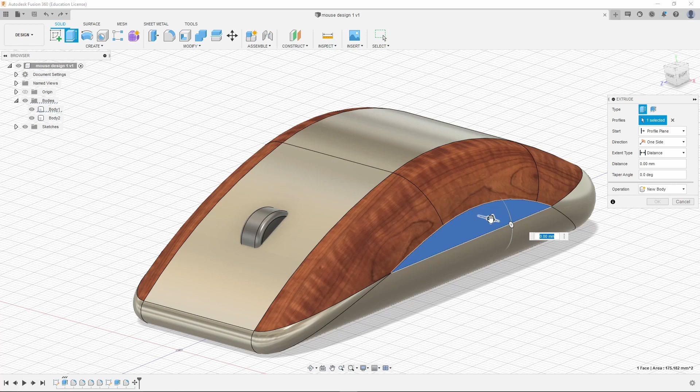With the Extrude tool, if I select a face, as you know by now, you can pull a face out and make it into 3D. But the same way as when we were creating the wheel and Fusion guessed we were trying to do a cut, it does the same with the Extrude tool.

As you can see here, I've pushed the Extrude into the design and it's gone red, and the operation over here has changed to cut. Now I could just push that all the way through like that and create a hollow space within my design, if that's what I was looking for.

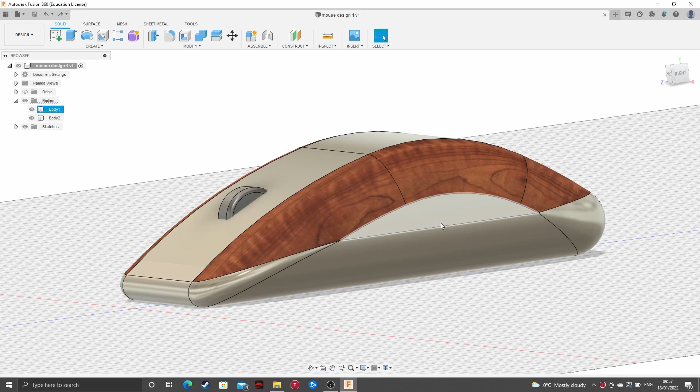As it happens, I am looking for that, but I also want to create a shape that fills this gap, which could be poked out and have additional functions on it. So I'm going to undo that, and instead of just cutting this through, I'm going to first make the component that will fit inside the space, then hollow it out afterwards. You'll see what I mean when I do this.

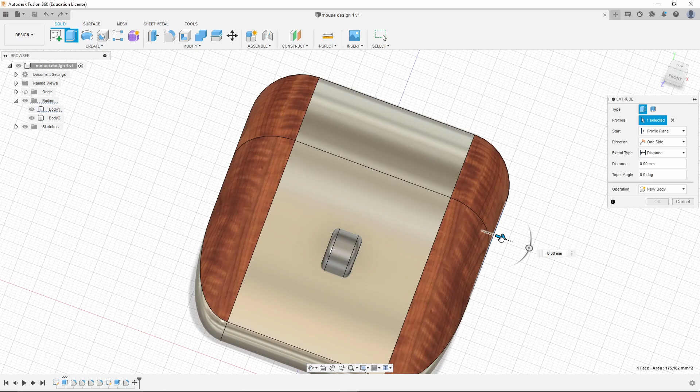If I get the Extrude tool, just like before, and select this face, I can either drag this through until it's level with the other edge. Because I used a nice round number in my design, my mouse is 54 millimeters wide. I could drag this until it's level with the edge, or rather than using distance here, I could go to Object, and as you can see in the description, it extrudes to a body, face, or plane that you select.

Let me show you how that works. If yours is a funny size, I can change that to Object and click on that face, and it automatically works out the distance.

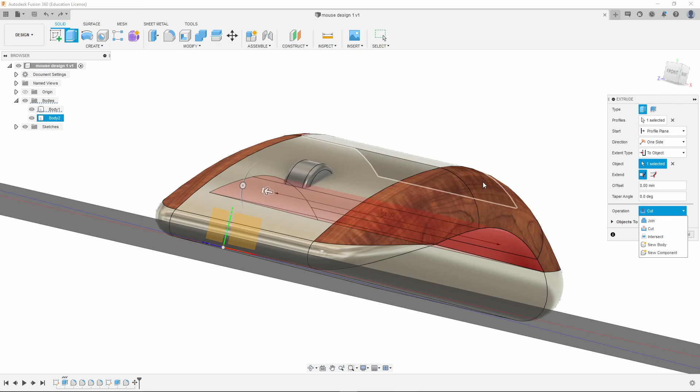Rather than doing what I did a minute ago, which was cut, I'm going to change that to New Body. Like when we created the scrolling wheel, this will be produced as a new entity. So let's do that and click OK.

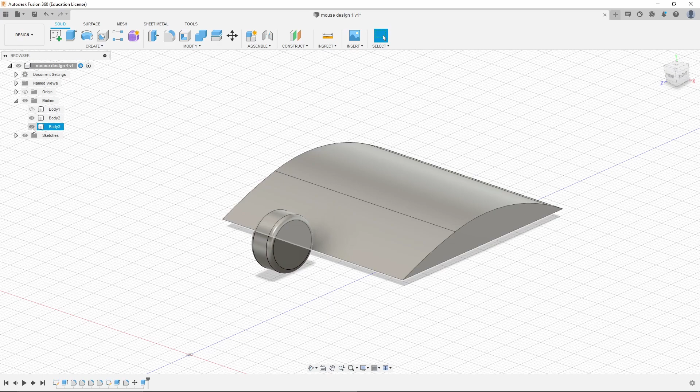As you can see now, I've got Body 1, which is the main body of the mouse. But I've also got Body 2, which is the wheel, and Body 3, which is this component here. I'm going to turn Body 3 off for now—I don't want to see it—and bring back the mouse.

Now what I'm going to do is what I originally did, which is chop out this bit here. So let's change that to cut—it'll do it automatically—and chop it through. There we are, we've got the hollow space inside, but if I bring Body 3 back, I've got the component that fills that space.

So I could color that in differently, or what I'll do to make sure that you can see that it's a separate component is select both of these faces and maybe put a 1 millimeter fillet on the edges, like that. There you go. So you can see now that is in there as a separate component.

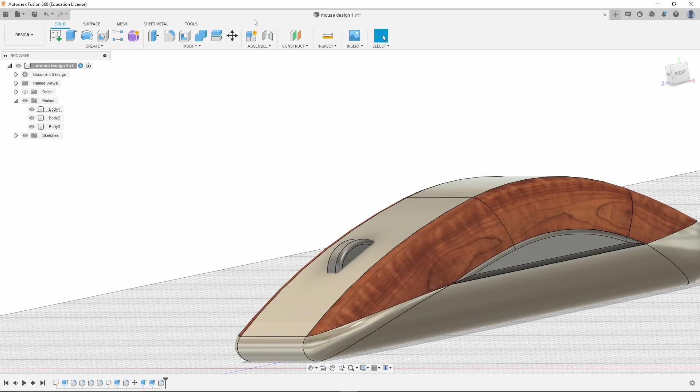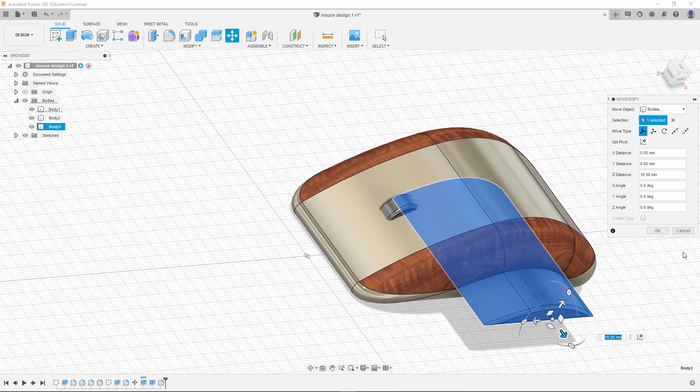And if you were creating renders of this, once you're happy with the design and you've applied all the materials, if you were working in this render workspace to create photorealistic renders, it might be a nice idea to grab this body and put it out slightly so you can see it sticking out of the design. Or maybe even do a completely different render where you've got the two components side by side, and maybe you've added buttons to this or something. I don't know, but that's how you create a hollow in the design and a component to fill it.

All right, let's get on with the main event, if you like. So we're going to be using these form tools. I'm going to create a new design. Let's save this one first and go on to a new design.

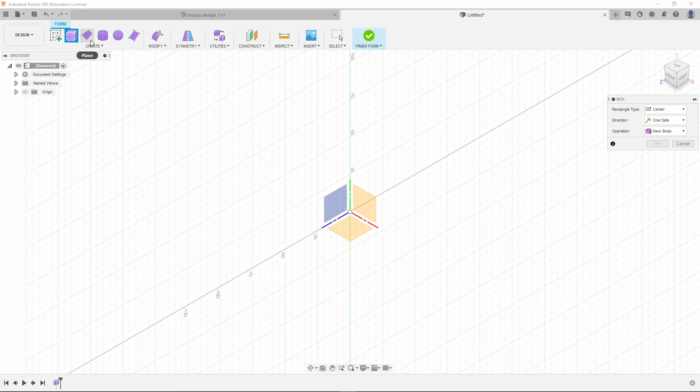So the form tools, the way they work is they try to imitate how you would work with plasticine or something. You take an object, a shape, and then you sort of smush it to shape as you like. Looking up here, you can start with different types of object - a ball, a cylinder, a flat plane, or in this case we're going to use the box.

So what I'm going to do is click on, where do I want to put my box? I'm going to do it on the top plane this time, so I'm looking down from above. You can see that because of the navigation cube. I'm going to click on the top plane and start at the origin.

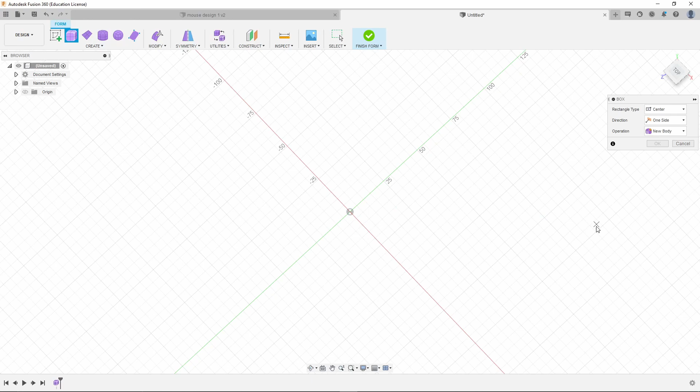This is important - make sure you start at the origin, not over here somewhere, because like when we did the last one, I've got the center of this rectangle in line with this green axis, which, like before, makes things easier when we're creating split lines, when we're creating things like the mouse roller and things like that.

So to start with, I'm going to look at these numbers on the dimensions and just make it the size that a mouse probably would be. Let's go with something like 120 long by, I don't know, 60 wide. There we go, 60 by 120, and go okay.

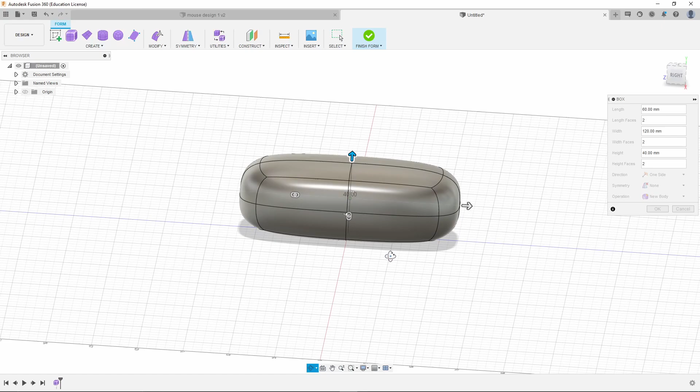The next thing it asks us is how thick do we want it? At the moment it's 30 millimeters. Just looking at my mouse, I think it's probably in the region of 40 in real life, so I'm going to drag this a bit taller. Let's have a look - am I happy with that? Yes. So that's created a block that is 60 by 120 by 40 tall.

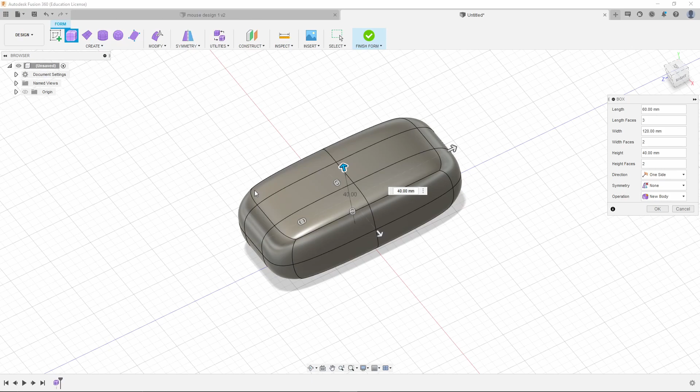And what you can do here as well, this is interesting - if you click on this, the length faces and the width faces, you can increase this number to show a larger number of divisions in your object. The more of these divisions you have, the more fine control you'll be able to have later on when you pull all this to shape. But the problem is, the more you have, the harder it is to get a sculpted, smooth, organic looking design. It becomes a little bit more jagged and a little bit more difficult to get a nice shape.

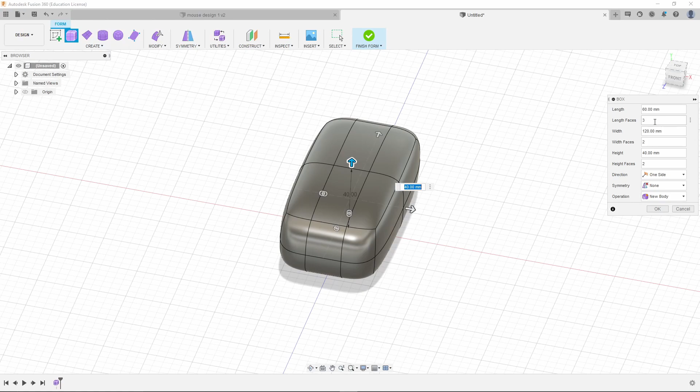So I'm going to go with... actually I might just keep it on 2 for the purposes of this. You can try using more, but I'm going to go 2, let's go 2 width ways. Yeah, let's go 2 and 2. Yeah, happy with that. All right.

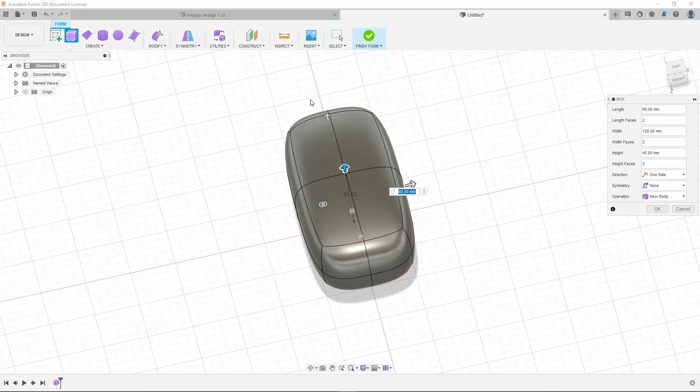Also, before you click OK, just make sure whatever numbers you choose here - and you can split these faces later on if you want a particular area to be more detailed - just make sure that one of the lines is on the axis, parallel to the plane, because what we'll do now is use this tool here, the symmetry tool.

So if I click on this, it's going to ask me to select faces. All I need to do is select 2 faces, and it'll pick up the line between them and go, that's where you want to create a symmetry line. So I've just clicked that one, and it's created a symmetry line. Am I happy? Yes, I am.

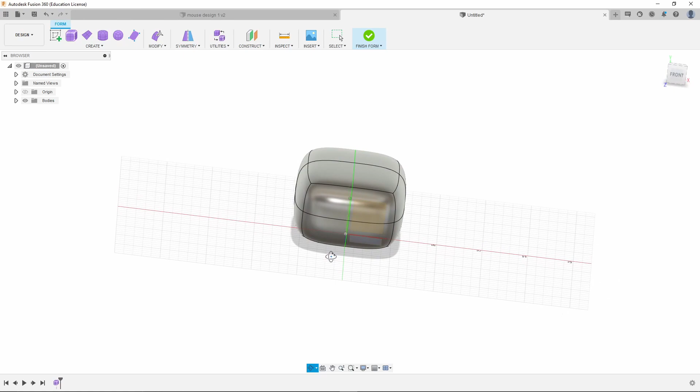It's really important to have that symmetry line in line with the planes. If I just click on sketch, you'll be able to see there's the planes, the original planes that you can work on. Just like before, when creating the scrolling wheel, it's more convenient to have the center of your design on one of those planes. It just makes life easier.

So I don't want to do a sketch, so let's come out of that. Right, so we've got a basic design. What do we do with it? Our options are all under here, under the modify tools. You can get to them by right-clicking.

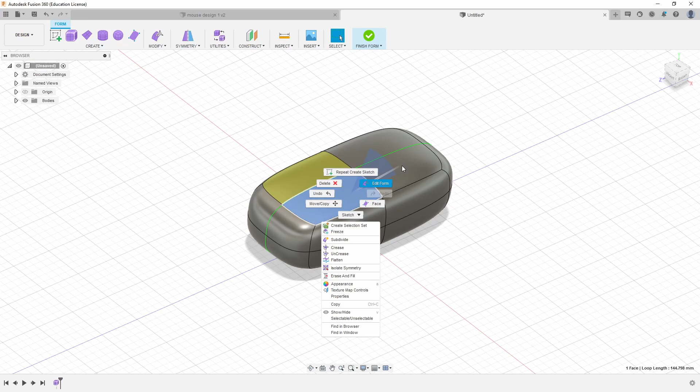So I can subdivide if I wanted to, which is what I was talking to you about a minute ago, about making certain areas a little bit more detailed, but I don't want to do that. There's other bits and bobs under here as well, which are all very useful, but I find them easier to get to by going under the modify toolbar and looking under here.

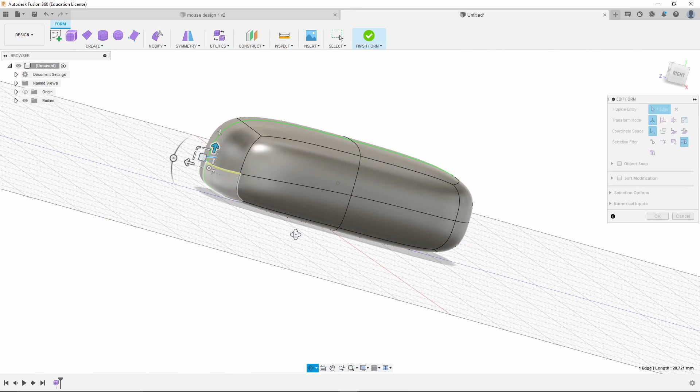So if I go modify, the one that's at the very top of the menu, and I click on any of these faces or lines or even points, I can start dragging them about. So what I might want to do, for example, is just bring the front of the mouse down towards the ground, like this. I've selected that line there, and obviously because it's symmetrical, it's picked up this one too. I can start using these tools to drag the design where I want, like that.

Let me just show you with a face. If I grab a face instead of a line, I've got these angle rotate tools, so I can rotate the face. I can shift it up, shift it down. I can pan it about, which is like a less accurate version of using the up, down, and left, right arrows. I can drag it left and right. I can do all sorts of things.

What does that do? Change the size of the face. That changes the height of the face. That changes the width of the face. So you've got lots of different options in here to start playing around with.

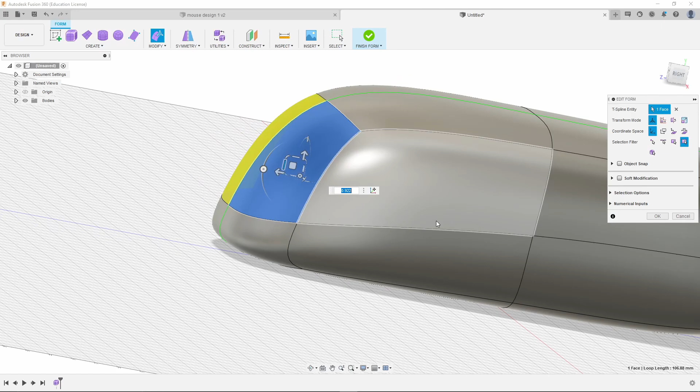Now, this is not something I can really sit here and teach you as such. Once you've sort of understood how to use the modify tool, it's about playing around and sculpting and just doing whatever you think works in order to create a design that looks right for you.

So you might be happy with that at the front, and we might want to put some dips inside. So we might want to grab this, for example, drag that in, and then maybe that looks a bit tall and a bit square, so you might want to drag that down. So you can just play around and tweak the design until you're happy with it.

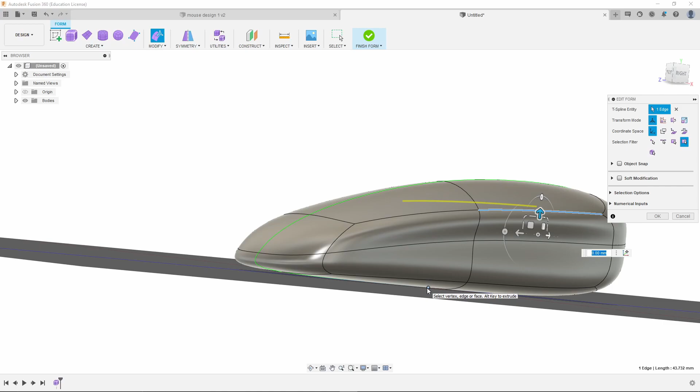But the one thing we need to be aware of here is, yes, it's all well and good doing this stuff and stretching it about, but the base of the mouse, as you can see, is not flat at the moment. And in real life, it probably would be. So what we're going to do is look at how to create this base, or create a flat surface on this base, that will help us have a more realistic design.

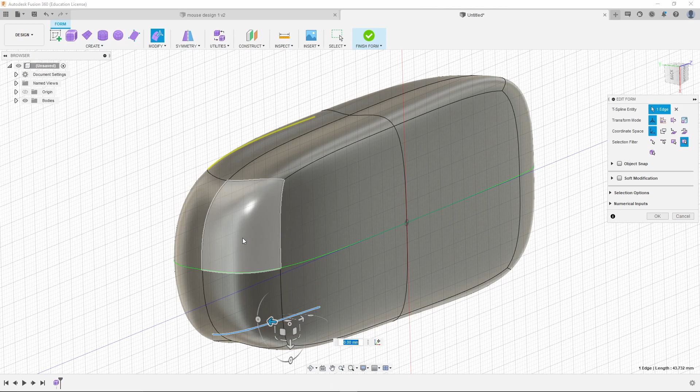Okay, and the first thing in understanding that is just by looking at these edges. Can you see? Let's have a look at this one, for example. There aren't any sharp corners on these lines. The way Fusion calculates the shape of the surfaces is by making sure that every line flows through a crossover point, or every surface flows through one of these lines in a smooth way. And we don't want that. We want these lines to be kind of like a sharp creased line.

So the way we do that - I'm aware that wasn't a very good explanation, but you'll see this when we do it - is we're going to use a tool called Crease. It creates a sharp edge between faces. If you look at the example it shows when you hover on it, you can see exactly what I mean. It's taken that smooth edge and created a sharp transition, which is what we want.

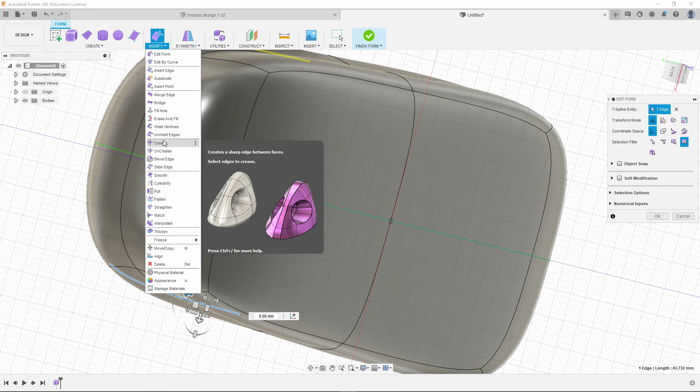So I'm going to go Crease, and it's asking me for edges. I'm going to click this one, this one, this one, and this one - those are the ones at the bottom of the mouse - and go OK. There we go. So what it's done is create sharp edges between them, and coincidentally, it didn't do it like this last time I did it.

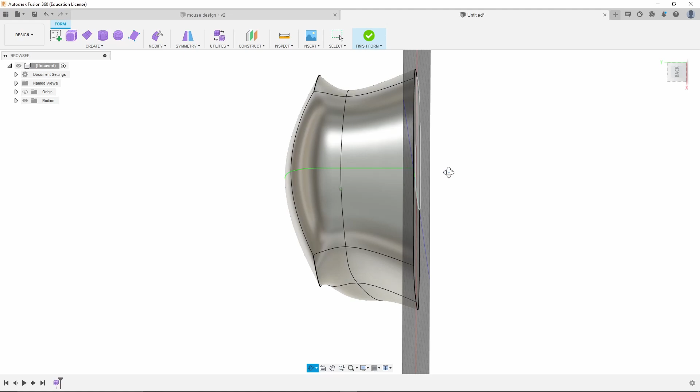It's created a flat face on the bottom of the mouse. If it doesn't create a flat face, if this is still not right for some reason, it should be, because these are the only lines defining it. I can't remember why it didn't do it for me before.

But if you want a flat face, if you've got a face that isn't flat and you want it to be flat, you can come under here and go to Flatten. So it will take a face and flatten it. You can play around with that if you need it - you might not, you probably wouldn't need it.

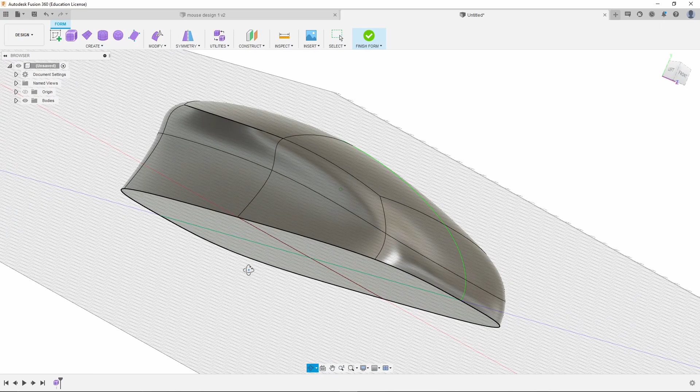So let's look at my design. Doing the crease tool has created those edges. It looks a little bit funky - this isn't quite the shape I was going for.

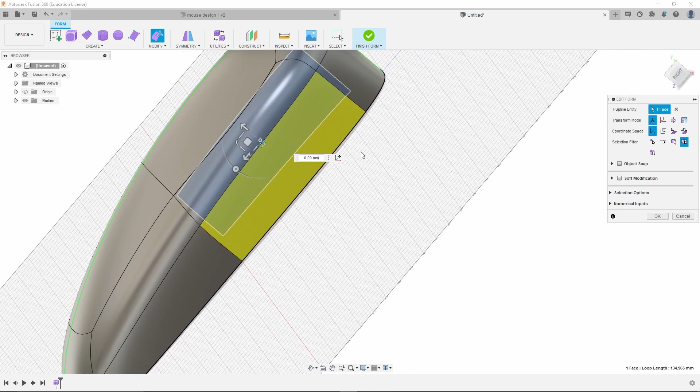So again, I can come back to this modify tool, grab some of these lines and say, right, maybe I want to pull that in, maybe I want to bulge that out a bit more, drag that about. Like I was saying, you can just play around with this as much as you want to create a shape that ultimately looks right in the end.

And I'm not going to spend forever on this. I'm not going to do a fantastic design - I'm just going to play around with it enough until we've got something that looks good enough for the next stuff I want to show you. That wasn't very good English, was it? All right, there we go.

And shall I leave it at that? Let's leave it at that. Boom. So under the form tools, you've got lots of stuff to play with - you can have a look and change stuff and do whatever you want in there.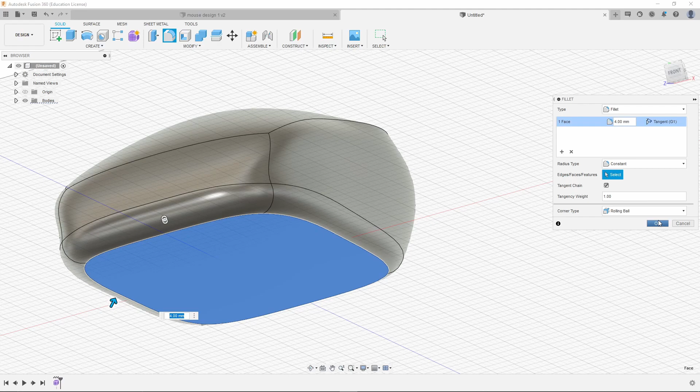Now, this bottom edge, before I move on to the next bit, I am just going to fillet it. So I'm going to come back into the fillet tool, grab that face, and stick a bit of a fillet on the bottom there, like that. Is that enough? Is that too much? That's okay, there we go. So I've just softened that bottom edge because it was a bit sharp.

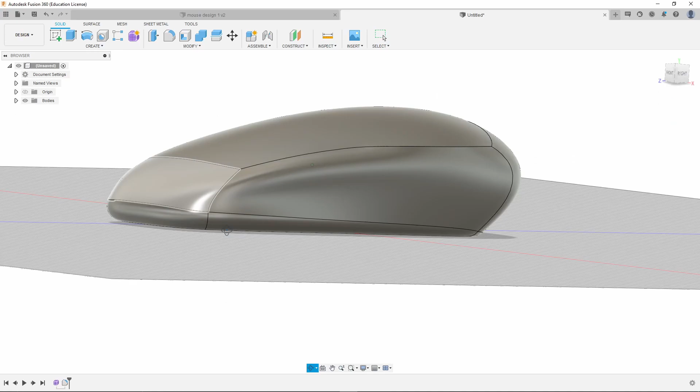And there we go, there's the basic shape of my design. By using these form tools, and if you subdivide a bit more, you can play around with things like thumb rests in the side, for example, or little recessed areas that you might want to put LED lighting in or something like that. I don't know.

But by using these tools and playing around with it, you can get some really detailed, intricate designs. But like I say, this one is just going to be the plain boring one you see in front of you. Right then, let's make a mouse wheel really quickly.

Same as we did before, I'm not going to dwell on how to do this because if you watched part 1 of my tutorial, you will have seen how to do this. So I'm just going to quickly create a scrolling wheel, finish sketch, extrude, make sure that it is symmetric, new body. It's come off - see, as soon as I started to extrude that, it's taken it off new body.

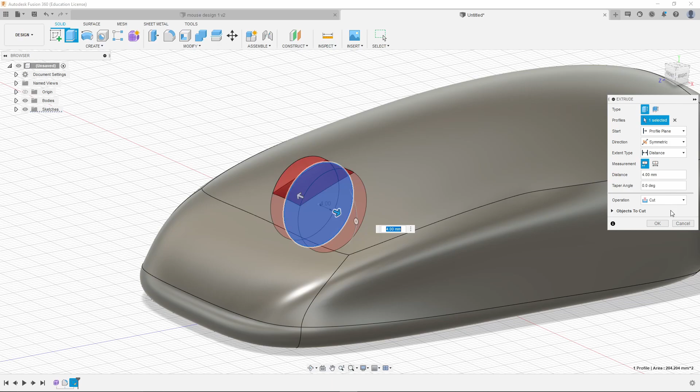And put it onto cut, which is not what we want. So just be aware, if anything lights up red as you're doing it, that means it's going to do a cut operation, which in this case is not what we want. So, okay, fillet - let's grab those two faces.

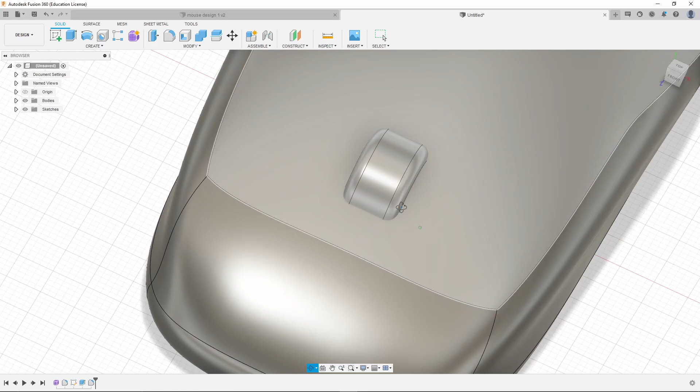There we go, that will do. I'm happy with that. Now there's all sorts of fancy things you could do with this. You could create a sketch on this face, for example.

Let me show you just for the sake of doing a more advanced tutorial. If I take away the body of the mouse and create a sketch on this face, what I can do is see if it'll highlight the center of that circle for me. Yes, it will. I hovered on the edge here of this circle, and when I come to the center of it, it should snap to that center point, and there it is. You can see it's a center point because it's got a blue circle there.

So from that center point, I'm going to change my line to a construction line. Probably don't need this, but I'll put it in anyway, a construction line like that, because now I've got a definite center point. Actually, I know I definitely don't need this, so let me just move on and I'll show you what I mean later on.

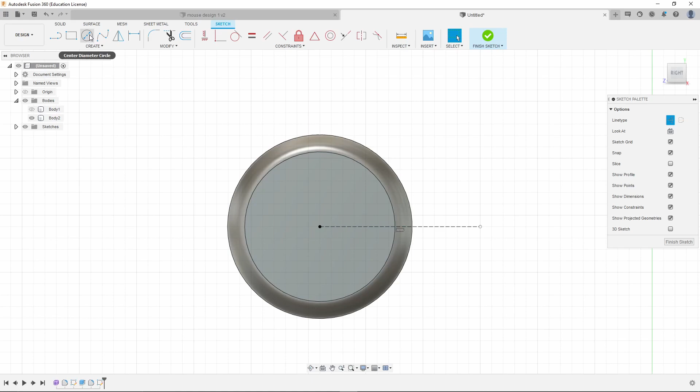What I'm going to do is create a series of indents for finger grips, effectively, on the edge of this. The way I'm going to do that is by creating, level with the center here, a little circle that just about clips into the mouse wheel, like that.

Then I'm going to use, under create, a circular pattern to select... oh no, hang on, what have I done? I've used the center line tool to draw this. That's not what I wanted at all. So what I didn't do, when I grabbed the circle, is change the type of line from construction line. So that's still checked, I need to uncheck that to get a normal line.

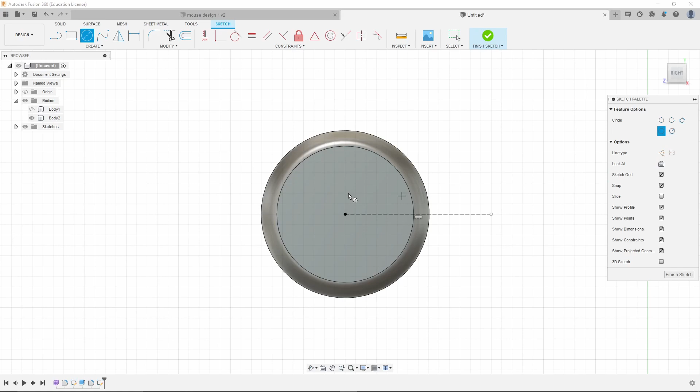So let's do that again. There we go, so it just about clips into the scrolling wheel. And what I'm going to do is go under create and go circular pattern, like we did a minute ago.

Object, well, this one, center point. Now I can either click on the point at the end of that line, which is why I drew it, or what I can do is click on that circle, and it'll find the center of that. If I click on a circle, it understands, oh, that's the circle you want to do the pattern with. So if I select that circle, what I've got here is quantity 3, angular spacing full.

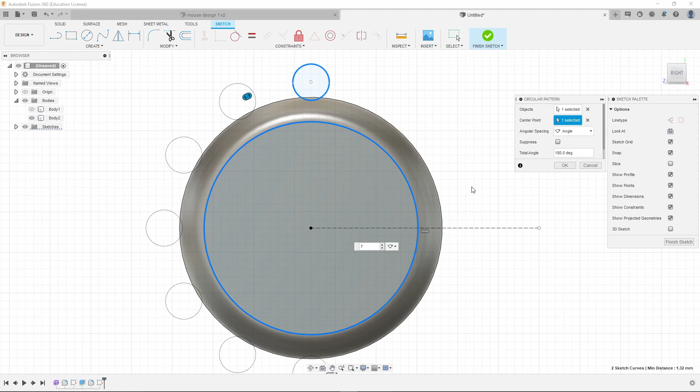So what I'm telling this is I want to go all the way around this circle and put 3 of them, or 4, or 5, or 6, 7, and so on. What you could do, if you didn't want to do that all the way around, is change that to angle, and look at what it's done. It's changed the angle to 180, so it's done that pattern just over the portion of the circle you want. In this case, we do want the full circle.

What I'm going to do is just keep increasing this number until I am happy with it. 25, a few more, there we go. So all I'm looking at is just how many of these sort of crossovers there are, and I'm happy with that.

Good, there we go. So in a second, what I'm going to do is do an extruded cut to cut those indents into that face.

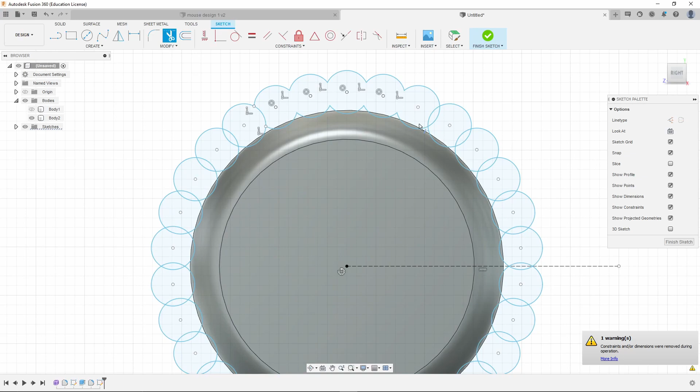Before I do that, though, I'm going to get the trim tool and just cut out the middles, so I can do it all as one shape, rather than having to try and extrude every single little bit and select every one. Whoops.

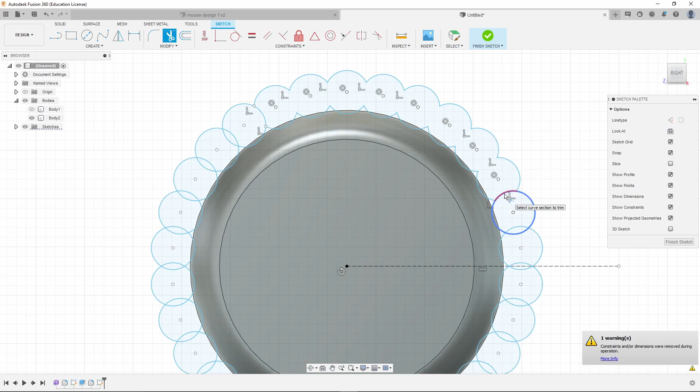What I can do is just do the whole lot in one go and cut it. Oh, okay, this is being a pain. So weirdly, with the trim tool, sometimes I can just click and drag across, and other times it'll take away the bits of the line that I do want. So you have to sort of click them one by one. So what I'll probably do, if I'm having to do that anyway, is just do it the slow way, because it's not actually going to save me any time.

So let's go extrude. I want to extrude that, but I also want to extrude that, and that, and that, and that, and that, and so on and so forth. So let me just select these.

There we go. Drag them this way. See, it's automatically gone red because it's worked out that it's intersecting with this body, and it thinks I want to cut them, which I do. So let's go OK. Give it a second to catch up. There we go, look at that.

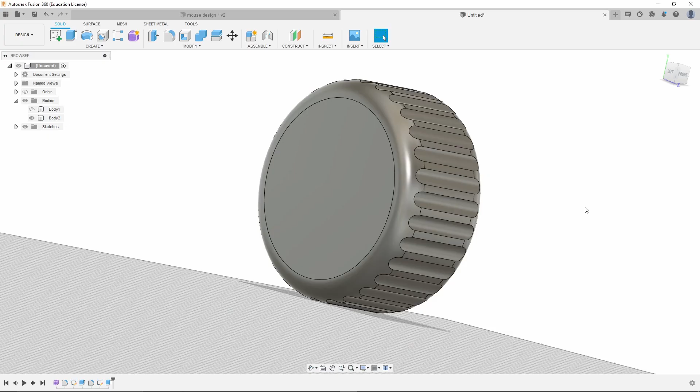So it just creates a bit of texture on the mouse wheel. It's not one of those things that's essential to do, but if we're in the business of doing more advanced techniques, then that might be something that you want to do.

Right then, the last thing I'm going to show you - I'm not going to talk about textures and renders and things like that. We touched on that in the first part of the tutorial, and if you've done any of my other tutorials like the cordial bottle design, there's videos to do with rendering in there, so you can go and have a look at those.

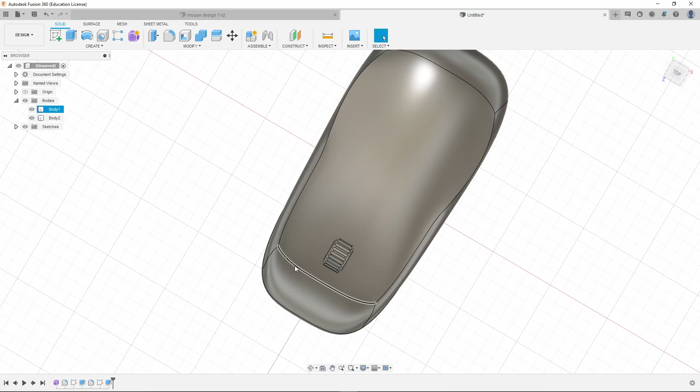But the last thing I'm going to do here is show you how to create the split for the clickable buttons. I could go into details about how to create a molding split line along here and how to take this apart in separate pieces, but I think for the purposes of the project that this tutorial is aimed at, we don't really need to do that. As long as it looks right, we'll be fine.

So, making the split line for the clickable buttons, what we need to do is do a drawing up here somewhere in the air and then cut down into this body here.

All right, so what we need is a plane to draw on that is up above. I don't want to draw on this top plane, because if I draw on this plane that's level with the base here, I'd have to cut all the way through the design, and I don't want to do that. So I need a new plane.

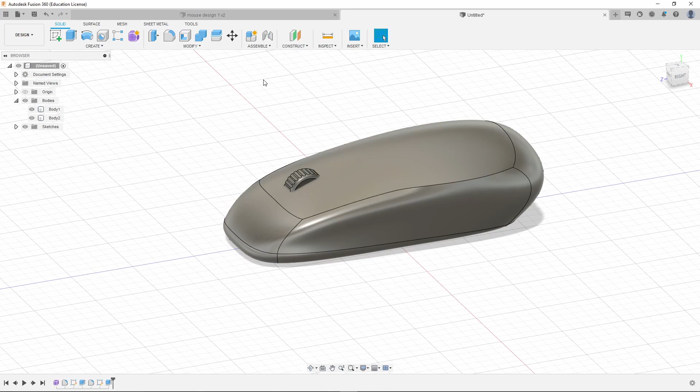The way I'm going to do that is if I hover on construct up here, you can see the very first icon is offset plane, which creates a construction plane that is offset from the selected face or plane, which is what we want. So click that.

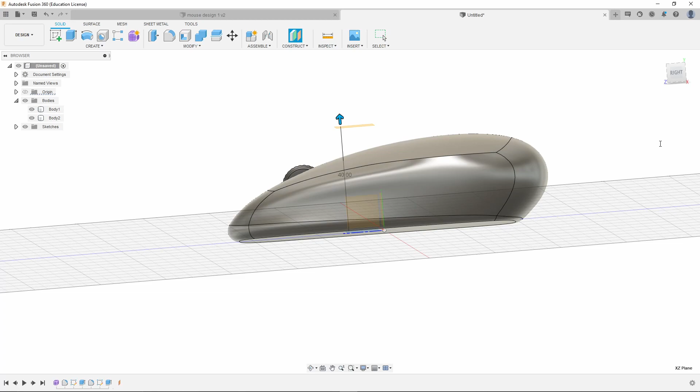I'm going to select the top plane, and I'm just going to drag that up until I am above my mouse. It doesn't matter where, as long as I'm above the top of the mouse, that's fine. And go OK. As you can see, that plane is visible.

And if I go under construction, there it is. There's a plane. I can turn it on and turn it off as I want. It's added it over here.

So then, let's get a sketch. Let's sketch on that plane. And what I'm going to do, first of all - there's a couple of ways you could do this, and there probably is a better way to do this than the way I'm about to do it, but this is the one that I've learned how to do, so this is what I'm going to show you. So I'm going to draw this just as a line to begin with.

So I'm going to do a line down the center, like this, to where I want the end of the mouse buttons to be. Because it's so far above, it doesn't help me to change the angle, so I'm just going to make a mental note of where I think it's going to come to. Yeah, we'll go with that.

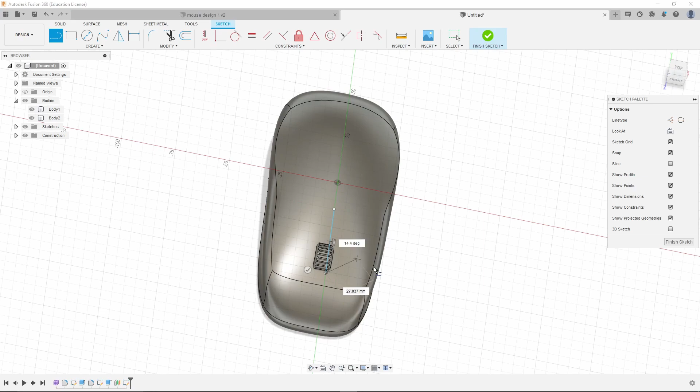And like before, I'm only going to do one side because I can use the mirror tool to copy it. So like when we made this, we only really worked on one side of this, and everything we did to one side, it did to the other. That's the same case with this. So I'll show you what I mean.

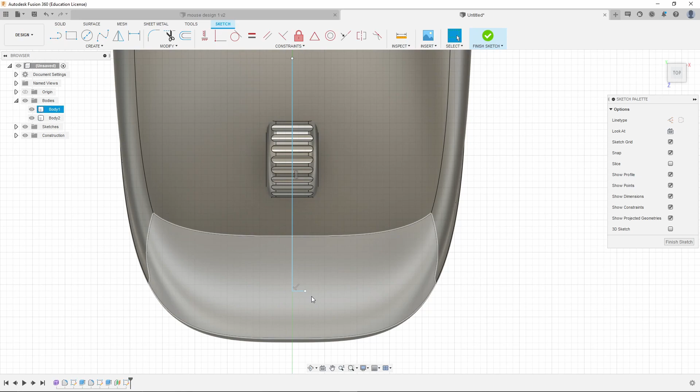Let's go to the arc tool, and I'm just going to do several arcs to create the effect I'm looking for. Nope, that's not what I wanted to do. I'm going to just start with a short horizontal line there, just to make sure that when this is mirrored, I've not got a point here. And let's go to the arc tool again, 3-point arc.

And let's curve it to, let's say, there. There we go. And bring that up to, let's say, there. Kind of happy with that. I might smooth out that corner using the fillet tool.

Let me zoom in. There we go. Just create a smooth transition.

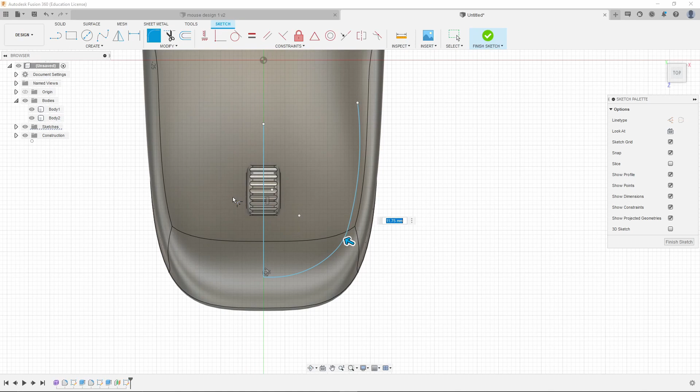So before I move on to the next stage, I'm just going to grab the mirror tool up here. Select that, select this, and select this line. And where do I want to mirror it? Let's click mirror line and click on that line. Oh, I've missed one, haven't I? So let's go back there and pick that one up.

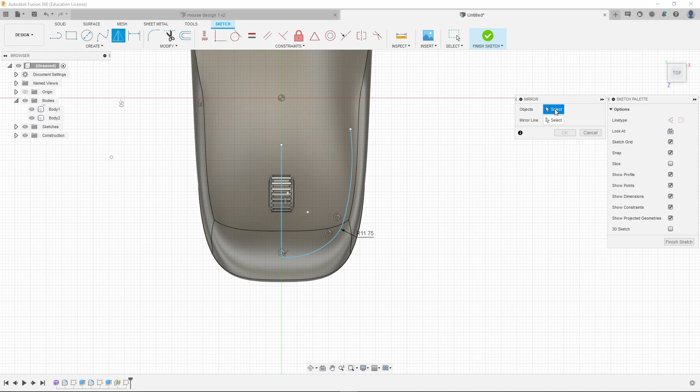One thing to note about the mirror line: let's say, for example, I wanted to choose the objects I wanted to mirror, and I just did this. The problem is, because I've got this line selected as one of the lines I want to mirror, I don't think I can then select it as the mirror line. See, it doesn't let me do it. So just make sure when you're selecting the lines that you want to mirror, that you don't accidentally pick up the one you're going to use as the mirror line.

So let's do that. Boom, there we go. Right, so I've got a line. I can't do an extrude with that line yet, so what I need to do is add a bit of thickness to it.

So let's look from above. Then I'm going to use this tool here under Modify, called the Offset tool. You'll see what it does when I select the line. So I'm going to click this line. And can I click that one? No, I have to do that one after.

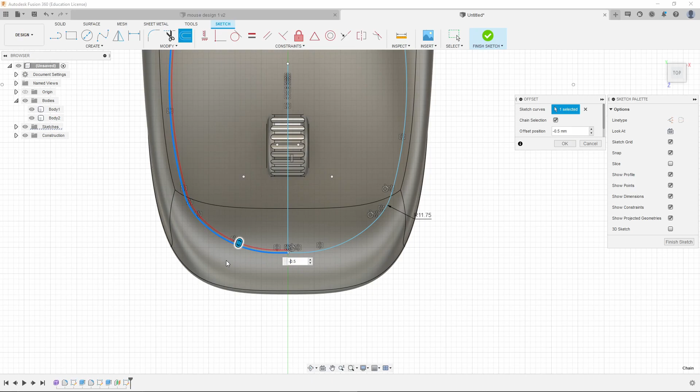What I'm going to do is decide whether I want to do this on the outside or the inside of this line. I'm going to go on the inside, I think, and go by 0.5 millimeters. Oh, hang on, if it goes on the wrong side when you do that, just click minus, put a minus in. There we go. So 0.5 millimeter, that's probably too much actually. Let's go 0.3 and hit OK.

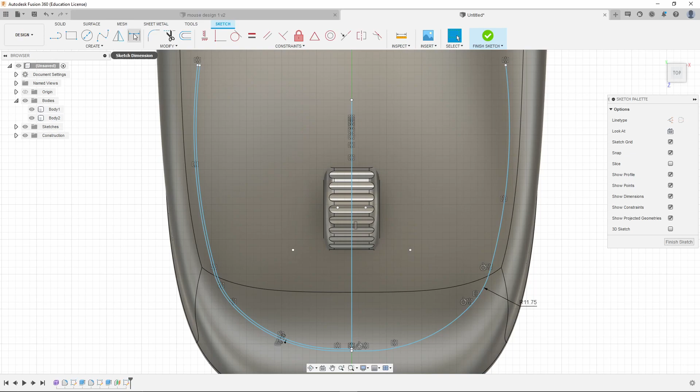And then I'm going to do the same with the other side, so 0.3 millimeters. Cancel, hang on. It's picking up this line, which I don't want it to do. So how do I stop it doing that? What I'm going to do to stop it picking up this line at the same time is just get my trim tool and trim away that little bit. There we go. In fact, if I've done that now, this would all select as one line, won't it? Oh, I could have done the whole thing in one go, probably.

But I'm just going to go minus 0.3. And yep, I'm happy with that. There we go. I also just noticed, I'll show you now, if I do the same on this line here... oh, why is it doing this? Why is it picking that up? Strange. Oh.

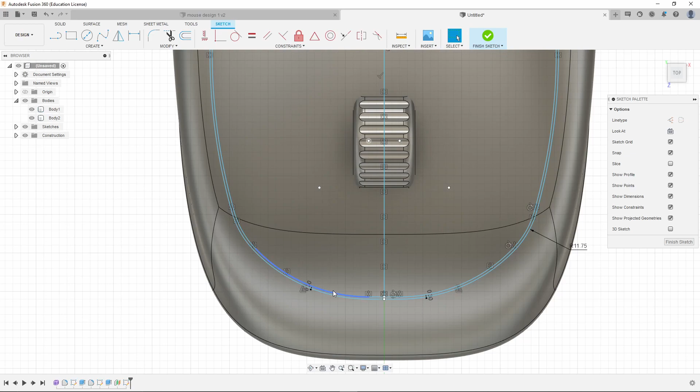For some reason, it's picking that line up at the same time, which I don't want to do. Maybe if I select just that line first and then click on offset. Ah, there we go. So because I selected the line first before clicking offset, it did what I wanted. But before, when I tried selecting the offset tool first and then the line, it was picking up this bit as well, which I don't want. But you can see here, look, there's a flip side button. So rather than typing minus before, I could just click that button and it effectively does the same thing.

So let's go with here. I'm going to go with the same split width, or the same line width, so half of the gap I had before. I need to go 0.15, which is obviously half of 0.3. Go OK. As you can see, it's put that line there.

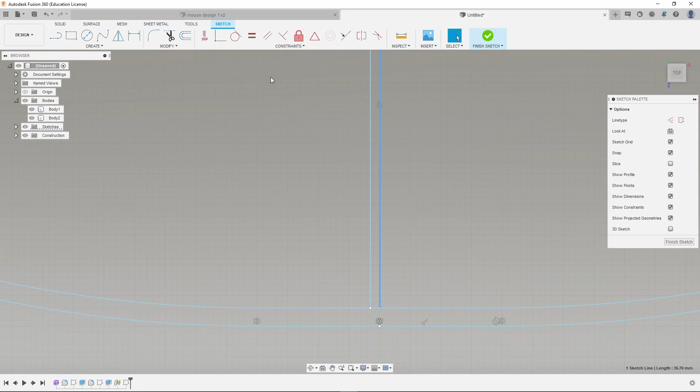And I'm going to do the same now on the other side, and put 0.15. But this time, hit the flip side button, and there we go, it's the other side. So it just keeps it central. You could probably get away with just doing it one side, but if you're picky, you'd always know it's starting off center, and it would bug you like it would me. So I can rub out this middle line now using the trim tool.

And I'm going to do the same down here, get rid of that bit, get rid of that bit. So I've effectively got a very thin shape that I can do an extruded cut with. But just be aware, before you do, it will only do it with a closed shape.

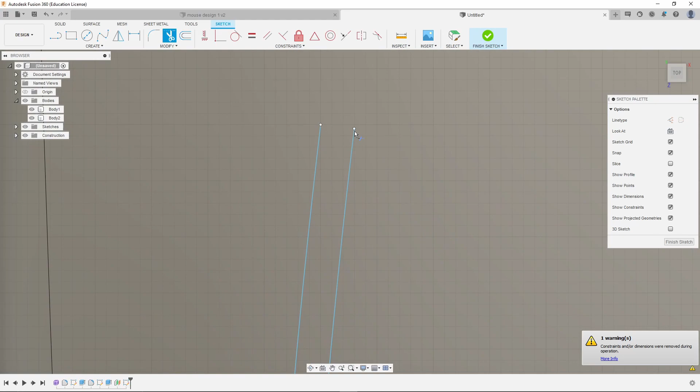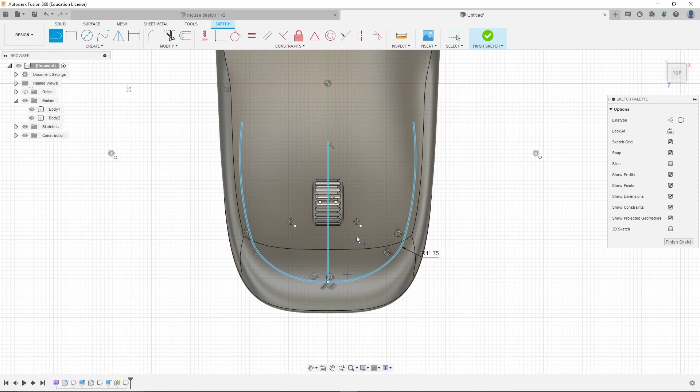If I zoom in on these ends, you can see that they are not joined. So you'll just need to get the line tool and click between the two ends, there and there and there, just to make sure we've got a completely closed shape. You'll notice it will change color when we do. Let's just do that. There we go, just put a bit of a blue fill on it so you can see that it is a shape.

And if you're really picky, I'm not going to bother, but you could put curves in these corners, put fillets in those corners to smooth them out. I said I wasn't going to do it, but now I've started it, I might as well. Select all those points. And there we are, it's put a fillet of 0.15 on all of them to make it nice.

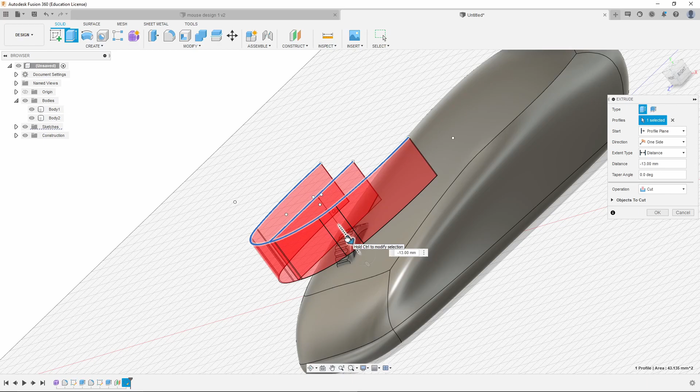Alright, let's finish the sketch and go back to the extrude tool. I already have the shape selected, so it's picked that up. And look, you can see this is what I meant before when I extrude things - it thinks I'm making a new body until it intersects with something else. And there you go, it changes red and creates a cut.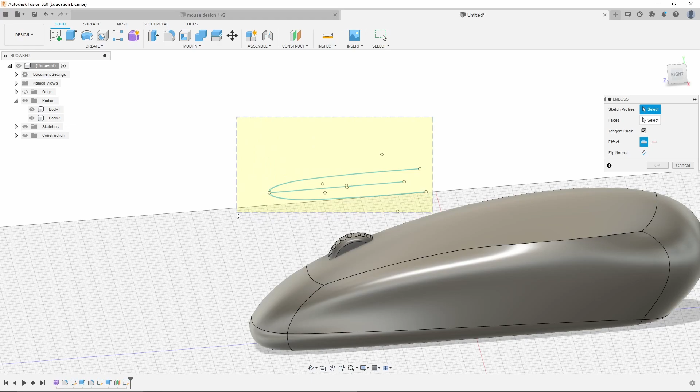So there's a couple of ways you can even do this bit. I'm doing this just as a cut, which means I have deep cuts there and shallow cuts there. You could, if you wanted to - if you've watched the cordial bottle tutorials I did before, you'll see I did an emboss. You could probably do it as an emboss. Where is emboss? Why can't I find it? There it is. So you could take these profiles and emboss them into that surface.

Okay, that's not working, it's strange. It seems to work with a surface that's curved in one direction, but when you have these sort of compound curved surfaces, the emboss tool for some reason doesn't seem to work. I'd be interested to know why, if anyone knows. So I won't do that.

But let's just do that, cut it into the surface. Just make sure the lowest point at the front gets cut. Go OK. And there we are - we've got that split line on the mouse, indicating where we've got those buttons. And oh dear, that did not want to do it.

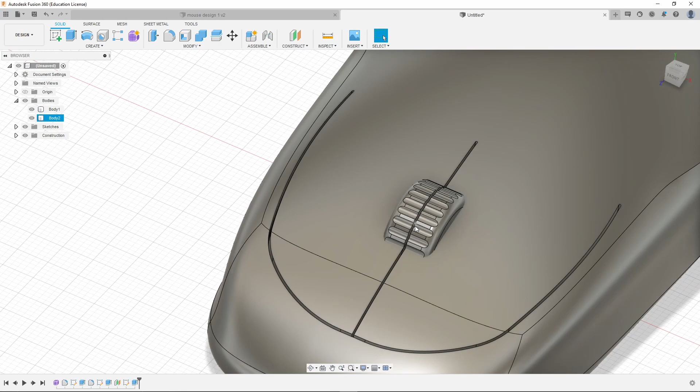Okay, if you get this happen, let's just look at how to stop that. So let me go undo. What I'm going to do is turn off body 2, get rid of it, hide it, and then chop that like that, and then bring back body 2.

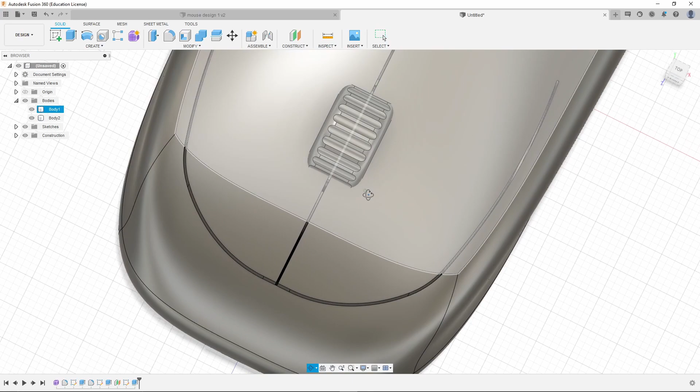There we go. And what I could do as well, if I wanted to, was when I'm looking from above and creating this shape for the split line - if I go undo, am I back in the sketch? Let me edit that sketch. And let's turn the wheel back on. In fact, let's turn the mouse off so I can see the entirety of the wheel.

Actually, I'm going to bring it back on. You could create a rectangle like this that goes just around the mouse wheel. So let's have a look at how wide that is. I want that 4mm wide, I think.

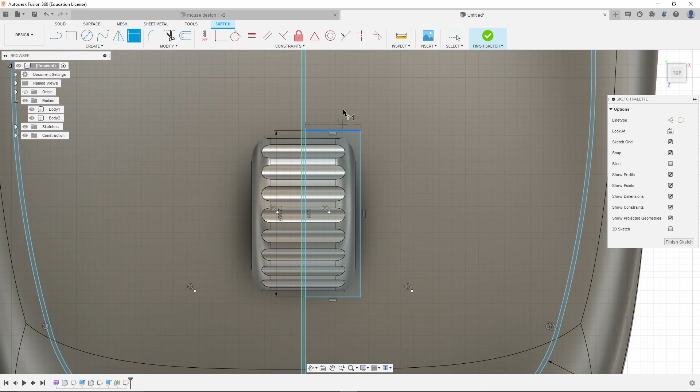So I'm just going to do that, change that to 4mm wide. The problem was, when it cut into there a minute ago, it didn't actually create a cutout for the mouse wheel, it looked a little funny. I should have explained that before I started doing it, but this is a kind of off-the-cuff tutorial, hence why I'm a bit rambly.

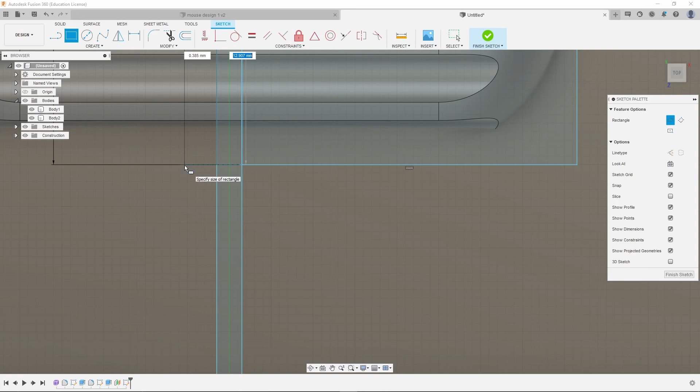There we go, so I've got it the same height. Now you'll notice what I did there - when I was drawing a rectangle, I hovered on this edge, because what happened was, when I was drawing this, if I hover on this edge, it works out that I'm trying to do something parallel to it and at the same length as it. So it just saves me doing another one of these measurements later on. So let's make this one 4 as well.

And let's fillet these four corners. That's fine, it'll just create a more realistic effect with the design.

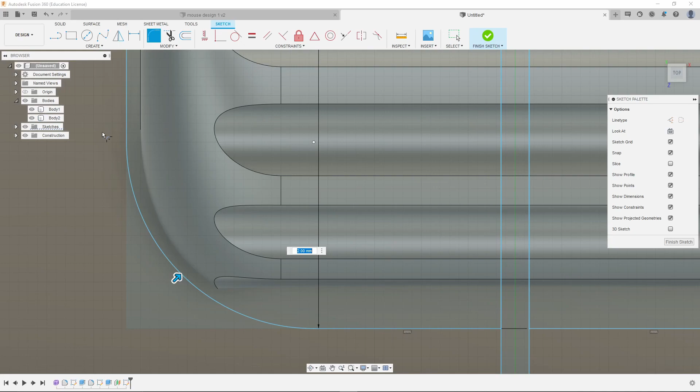So what I'm looking at here is where the body of the scrolling wheel crosses with the body of the actual mouse itself. As you can see, it's along this edge here, this line here. Hard to see, but I'm just making sure that cutout looks right in relation to that. So let's not finish sketching it yet.

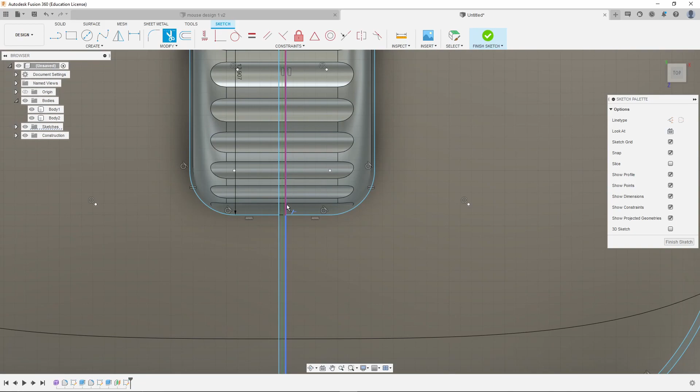Let's cut that away. There we go, so that's now all one shape. And go finish sketch. There we are.

So this time, if I do the same thing as we did before with the extruded cut, like that, and go OK, I've chopped away my thing again. Same problem, should have learned my lesson.

Chop it like that, OK. Make sure I haven't gone through the mouse entirely. Bring back the wheel, and there we go. So you can see the mouse wheel sits within a recess within the design, like that.

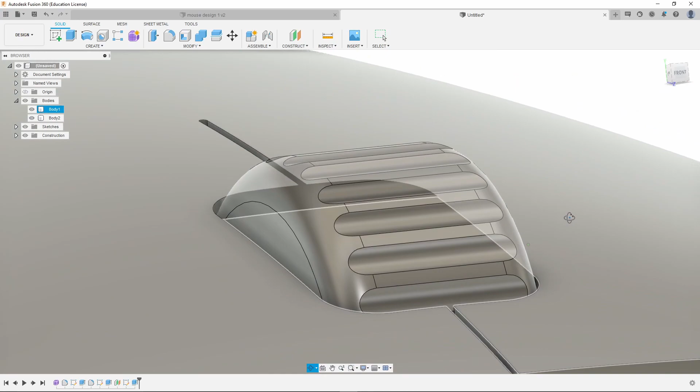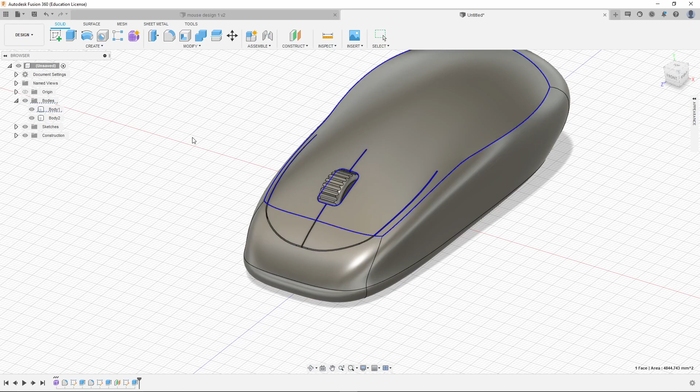The only thing left for me to do now would be to apply materials to this, and so on and so forth. The one thing I will show you when it comes to materials—I know I said I wasn't going to do this—is if I go to appearance. This is something I didn't show you in the other tutorials, or in the bottle tutorial, that might be useful for this project: using materials that actually glow.

So let's say I wanted my mouse wheel to be see-through plastic that glows. What I can do is come up to plastics in my materials, or glass. Let's go glass, textured. Let's go, I want a coloured one really—let's go green glass and drag that onto the whole body.

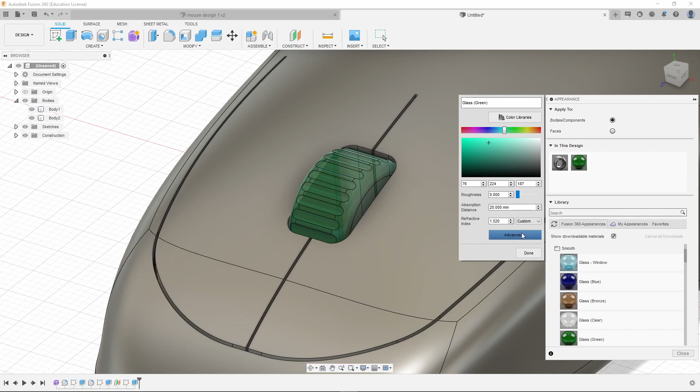There we are. What I can do is right click on this and go edit, and edit my material as I would with any other material. But crucially, if I come under advanced, I have this option—where is it? Let me have a look.

I can't see it, why can't I see it? Maybe you can only do it with certain materials. But there is a radiance option that allows you to actually choose how much this lights up.

I'm not going to fuss with it now because I haven't done the research on this. I thought you could do it with every material, but apparently not, unless I'm missing something. There's certain materials where you can actually change how radiant they are, how much they glow, and it doesn't really look any different in here.

It might make them a bit paler, but when you go to the render workspace, you'll be able to actually create parts of your design that are glowing, if you wanted to put like RGB features, for example, on a computer mouse.

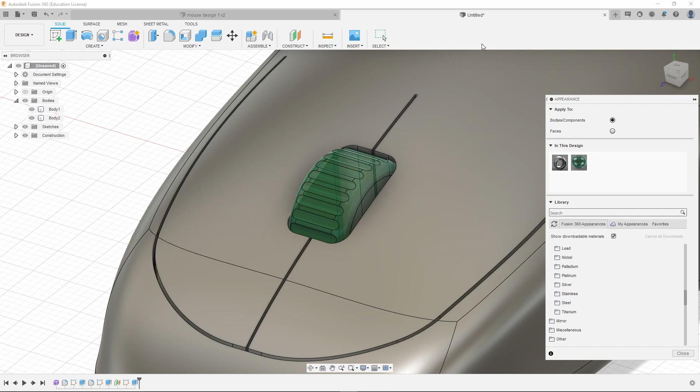All right, so in terms of this tutorial, I think we are finished. So we've covered the form tools, how to create this cutout, how to do creases on these edges, and how to do circular patterns and things like that. I think that's enough for you to be getting on with for now.